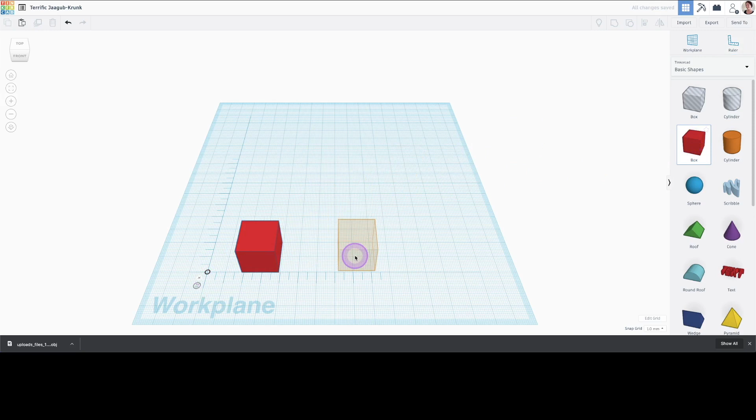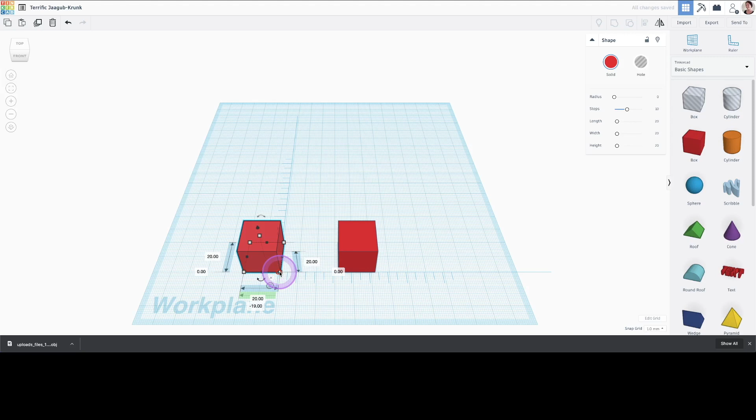Selecting the box will allow me to see the precise distance between the left edge of my box to the ruler. Let's do 20 millimeters. Now I'm going to click and move my ruler and click on the other box so I can arrange that one too. I'm a little bit off the mark, so let's correct that and make sure they're 20 millimeters apart.

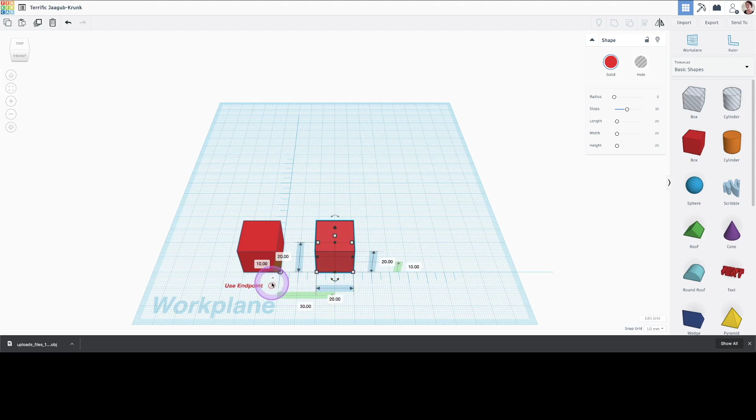I can also use the ruler to kind of stagger my boxes, but in this case I'll keep them on the same line. You can toggle the ruler so it's measured from edge to midpoint, or keep it from edge to edge. You can click on the circle to rotate the ruler around. I use this method very often, especially when I want to arrange multiple objects around a reference point.

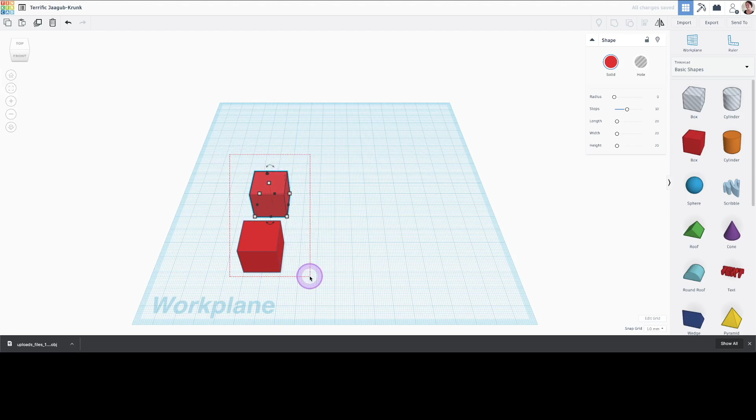We are done with the ruler tool for now. Let's move on to the Workplane, which is another very powerful tool in Tinkercad.

So I have here a little red box, and I would like to put a cone or something on the right side of my box. What I'm going to do is click on the workplane or press W, and I'm dragging it over to the right side of my cube.

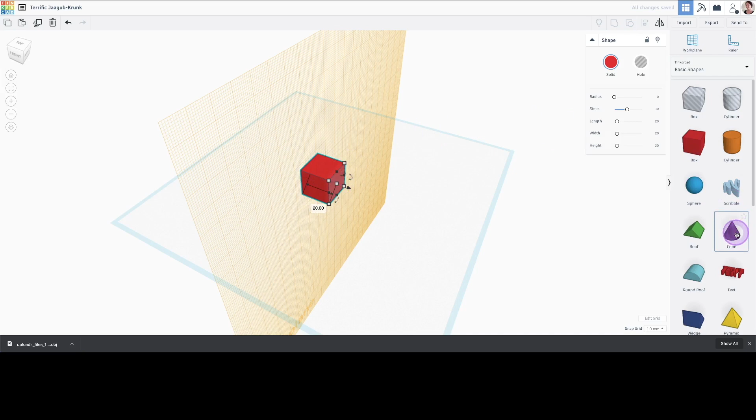Now I'm going to drag the shape that I want onto the plane, and it automatically reorients my shape so that it sits on the right side of my cube. To exit the tool, I click on it again and click on the yellow workplane to return everything to normal. That was awesome, so I'm going to do it again.

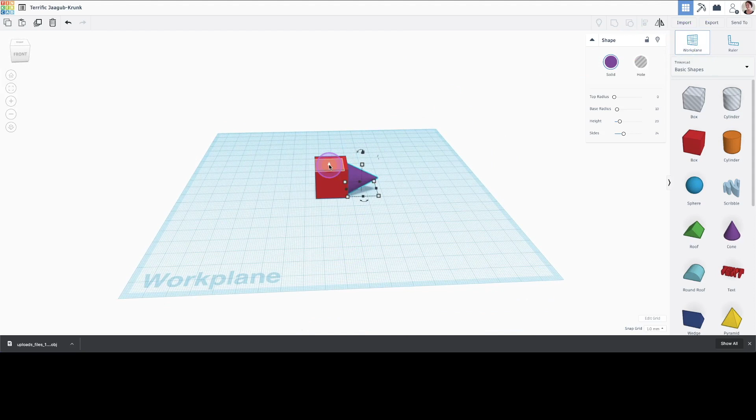This is probably my favorite tool, guys. This time I'm going to apply some text onto the front of my box. Now my text is huge, so I am going to resize using both the control panel on the right and the click and drag method.

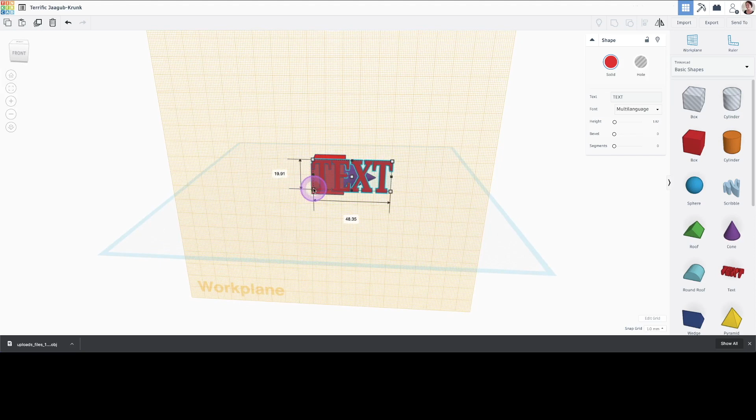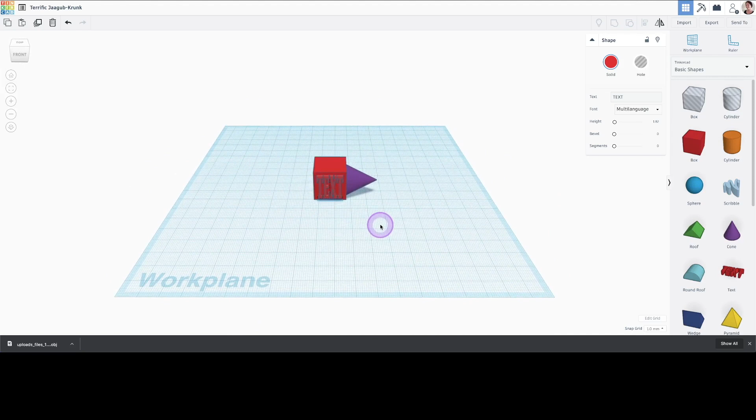As you can see, with the Workplane tool, we can very quickly and precisely attach multiple shapes together, which is really the meat and potatoes of how Tinkercad works. And that is the end of our video, guys.